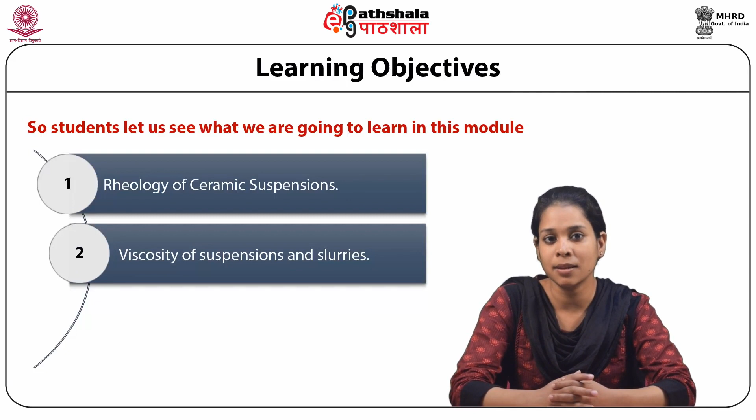Let us see what we are going to learn in this module. First we will discuss rheology of ceramic suspensions, then viscosity of suspensions and slurries, and lastly ceramic forming by casting.

Before moving into this module, we discussed dry pressing in the previous module. Dry pressing is a common method to form ceramic shapes, where dry powder containing a small amount of binder is used.

Ceramic shapes can also be produced from several other techniques. One is the casting process, in which slurry of ceramic particles is used to cast the required shape in a porous mold. This technique can produce complex shapes as well as massive refractory shapes, and is also used for advanced ceramics because of the ability to control agglomerates and achieve uniform mixing of additives.

Other than that, there are various techniques available for shaping a paste of ceramic powder, including extrusion and injection molding. These forming techniques are discussed in this module and we will discuss them one by one.

First we will talk about rheology of ceramic suspensions. Rheology concerns itself with the flow and deformation of materials. It is of great importance in the casting process. The parameter most commonly measured in rheological measurements is the viscosity.

In ceramic processing with suspensions, slurries and paste, it is essential to know the rheology. Rheology is important in processing as well as in operations such as storing, pumping, transporting, mixing, etc. of a ceramic system. A ceramic system such as suspension or slurry is a complex system.

The rheological behavior of such a system depends upon particle size, concentration of particles in the suspension, the interaction present between the particles, and other factors. So there are different types of rheological behavior in ceramic suspensions.

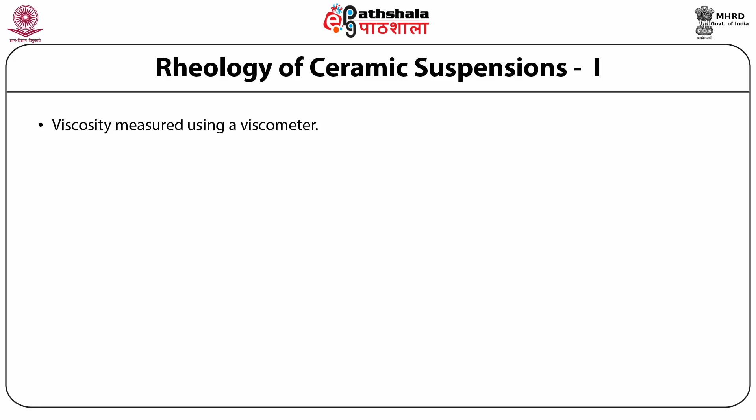The viscosity of a suspension is measured using a viscometer. The shear rate used for measuring viscosity can be varied. For a given shear rate, a shear stress is applied by the viscometer. The ratio of the shear stress to the strain rate is called the viscosity, given as tau equals eta times gamma dot, where tau is the shear stress and gamma dot is the strain rate.

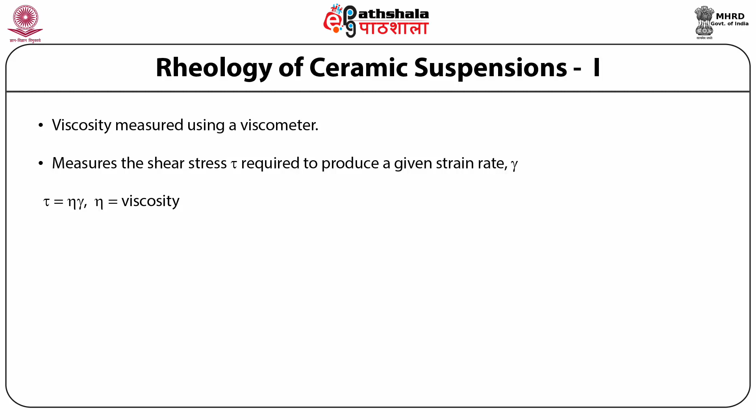It should be noted that the viscosity eta is generally a function of the strain rate, except in one case which is discussed in the next slide.

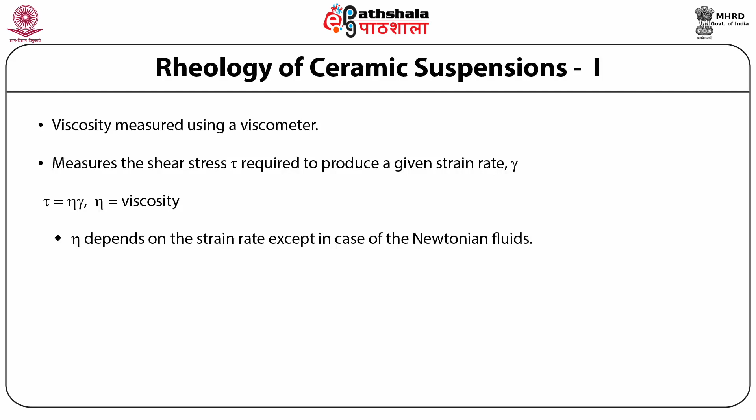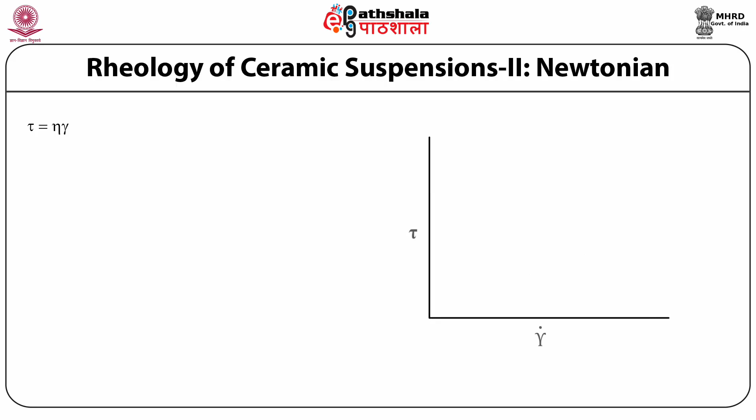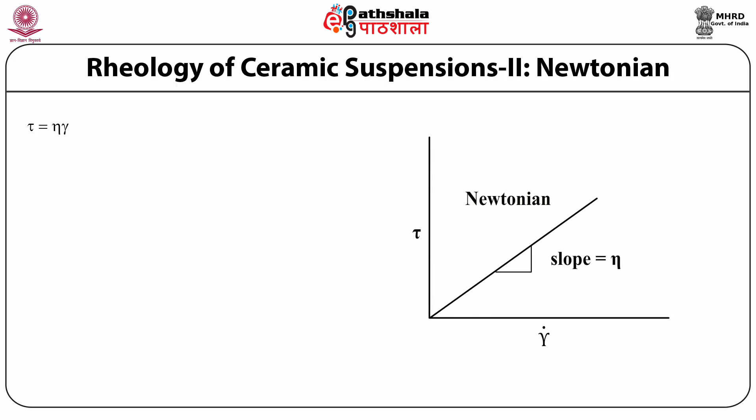The rheology of ceramic suspension can also be Newtonian type. The Newtonian viscous behavior of gamma dot is discussed here. When the shear stress is directly proportional to the strain rate at all strain rates, and the constant of proportionality, the viscosity, does not change with the strain rate, then the behavior of the fluid is called Newtonian viscous behavior, shown in this figure.

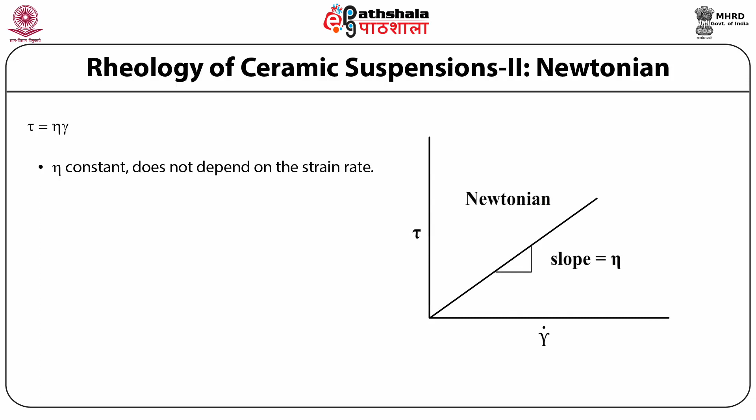In this case, a plot of strain rate versus stress is a straight line. Such behavior is found in pure liquids and in dilute suspensions.

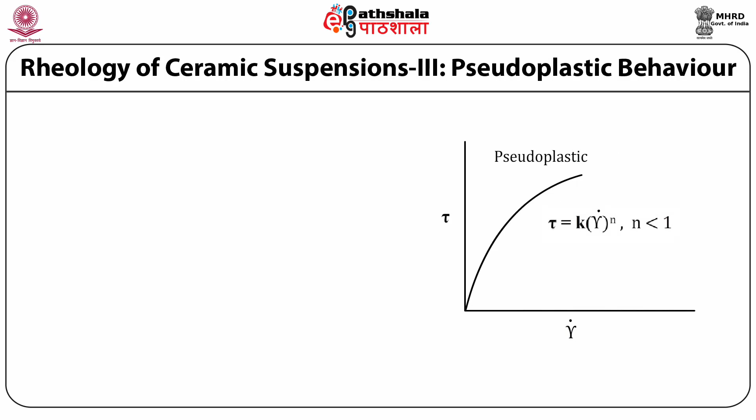The next behavior is pseudoplastic behavior. In this case, the viscosity decreases with increasing strain rate, that is, the apparent viscosity, given as eta A equals tau divided by gamma dot, decreases as the strain rate increases.

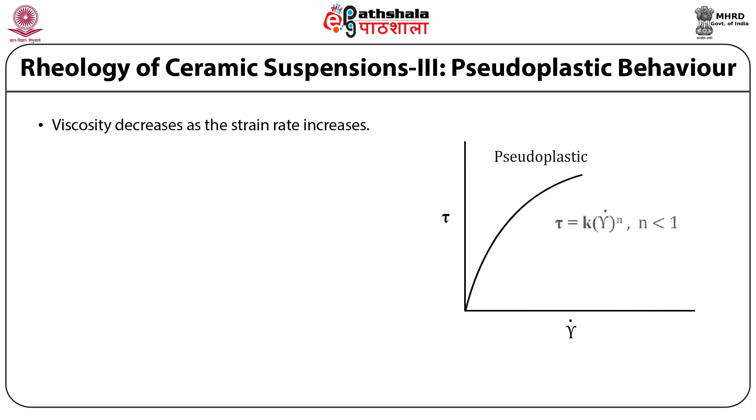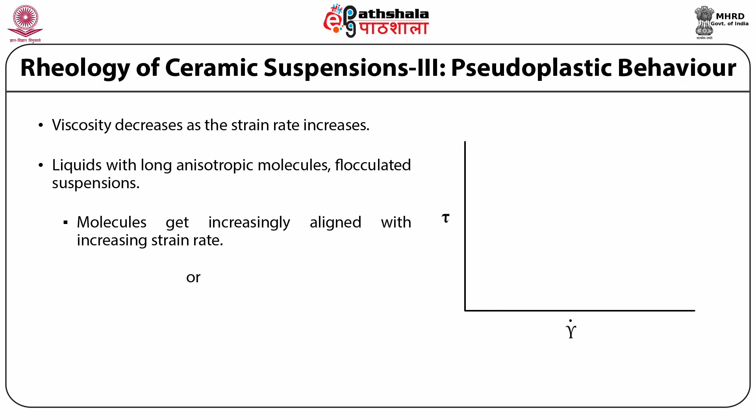A plot of strain rate versus stress has a decreasing slope with increasing strain rate, as shown in this figure. This behavior is found in liquids with long anisotropic molecules, suspensions with long particles, and in flocculated suspensions. As the shear stress increases, the molecules or particles get aligned in the flow direction and the strain rate increases. This behavior can also be described by the power law, stated as tau equals k times gamma dot to the power n, where n is always less than 1.

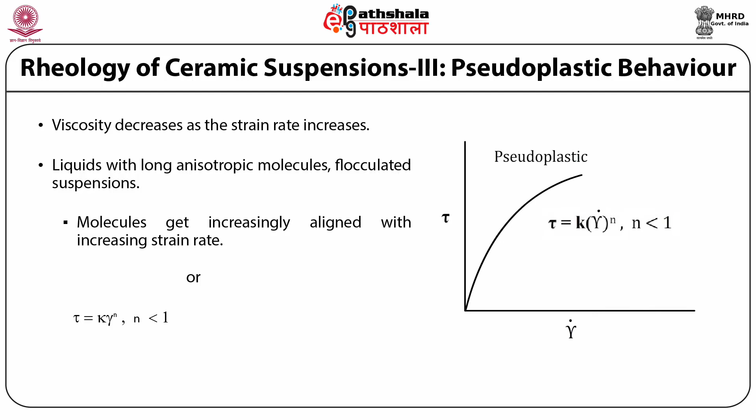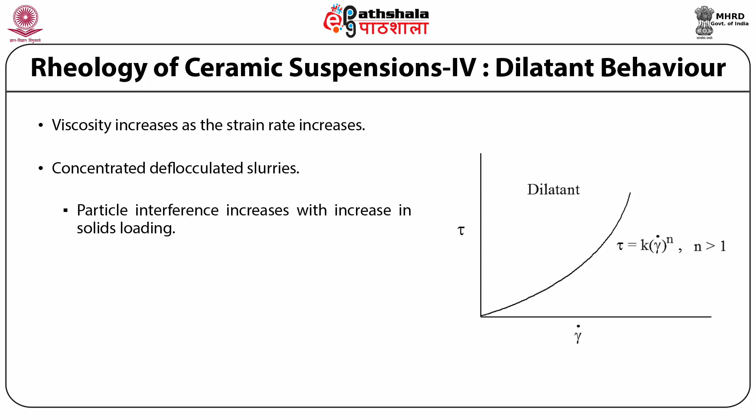This behavior is characteristic of concentrated deflocculated slurries. With increasing strain rate, particle interference increases, leading to an increase in viscosity. This behavior can also be described by the power law mentioned earlier, tau equals k times gamma dot to the power n, with n greater than 1.

In all the cases mentioned earlier, sometimes the plot does not start at the origin but starts at a finite value of the shear stress.

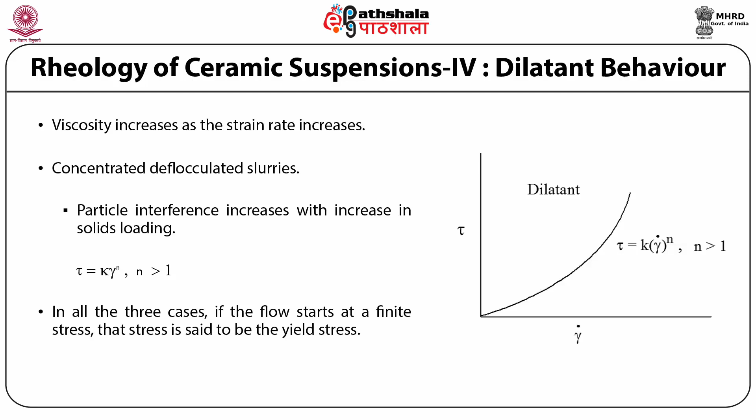The strain rate remains zero until the shear stress increases above a certain value. This value of shear stress is called the yield stress.

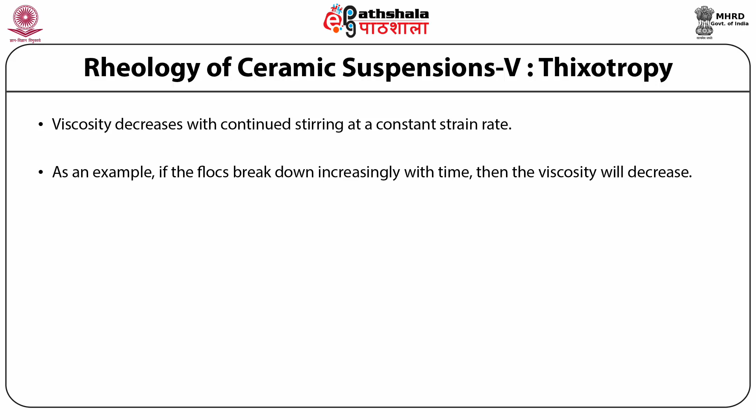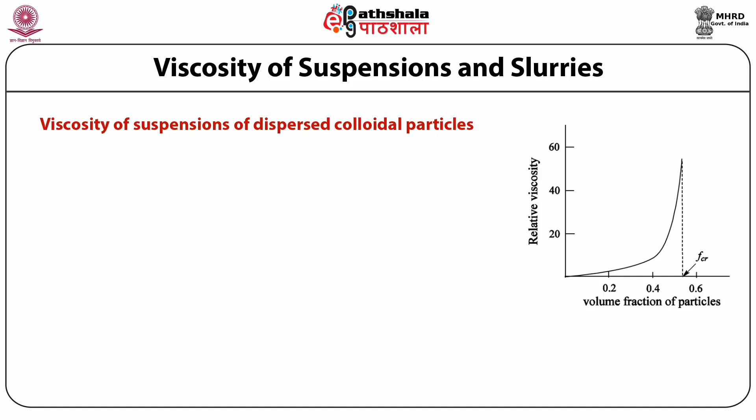So in this slide, we will discuss the viscosity of suspensions of dispersed colloidal particles and the viscosity of concentrated suspensions and slurries. We will first talk about viscosity of suspension of dispersed colloidal particles.

In this case, a relative viscosity eta R can be defined as the ratio of the viscosity of the suspension to that of the pure liquid, given as eta R, the relative viscosity, equals the ratio of eta suspension and eta liquid.

For a very dilute suspension of non-interacting spheres in a Newtonian fluid, the relative viscosity is given as eta R equals 1 plus 2.5 times F, where F is the volume fraction of the particles. The increase in viscosity with increasing F is caused by the dissipation of energy as the liquid moves around the particles. This equation is known as Einstein's equation.

Now, if we talk about non-spherical particles, then the constant in this equation, eta R equals 1 plus 2.5F, the constant is more than 2.5. It will not be 2.5.

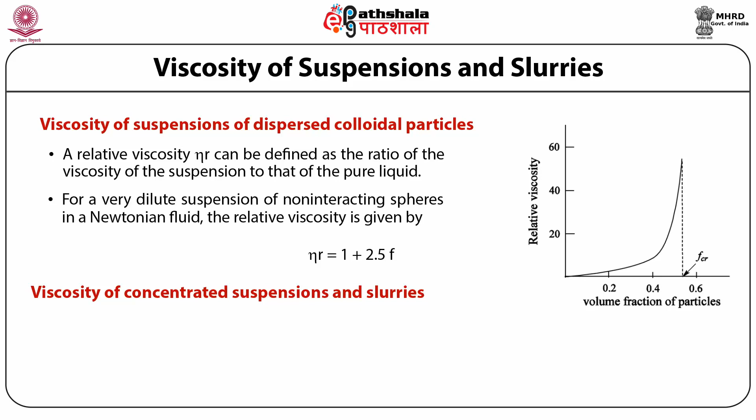Now we will discuss the second case, the viscosity of concentrated suspensions and slurries. The equation described above for relative viscosity is valid for dilute suspensions. When the concentration of particles is greater than 5 to 10%, the interference between the particles causes the viscosity to increase rapidly. The behavior of concentrated suspensions and slurries can be described by an empirical equation.

This equation is given as eta r equals 1 minus F divided by FCR, to the power minus K times FCR, where FCR is the critical packing factor at which flow is blocked and K is a parameter. The behavior can be seen in this figure. For an aqueous suspension of latex spheres of diameter 0.7 micrometer, it was found that K is 2.7, and FCR is 0.57 to 0.68 depending on the shear rate.

The same expression describes the behavior of slurries, which may have particle size distribution ranging from colloidal to coarse particles. So a simple equation can be eta r equals 1 minus F to the power minus K. This equation is used sometimes. In this equation, K equals 3 for a continuous distribution of sizes that pack more efficiently, and K equals 21 for coarse particles of uniform particle size. Now, as 1 minus F is less than 1, eta r is higher for the latter case.

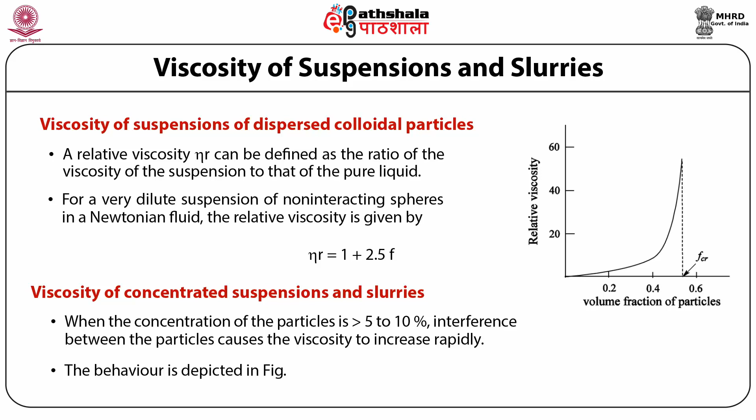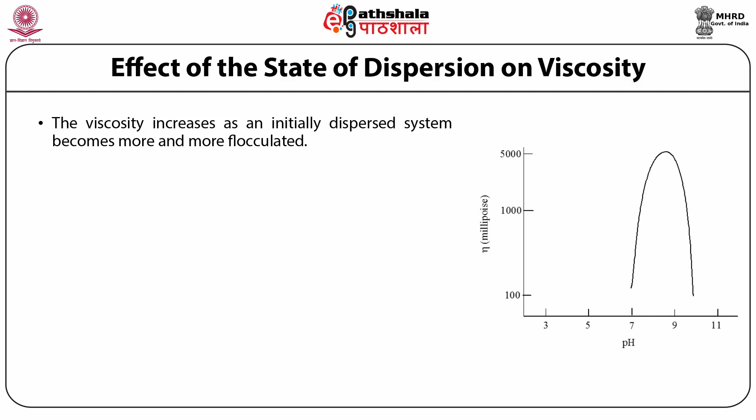Now we will discuss the effect of the state of dispersion on viscosity. The viscosity increases as an initially dispersed system becomes more and more flocculated. An example is shown in this figure where viscosity is plotted as a function of pH. Near the isoelectric point, aggregation of the particles occurs. The increased torque required for this causes an increase in the relative viscosity.

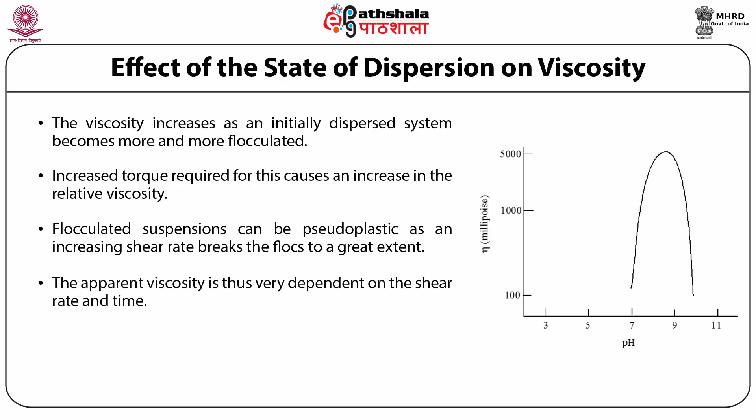The flocculated suspensions can be pseudoplastic, as an increasing shear rate breaks the flocs to a great extent. It can also be thixotropic if more and more flocs break with continued stirring. The apparent viscosity is therefore very much dependent upon the shear rate and time.

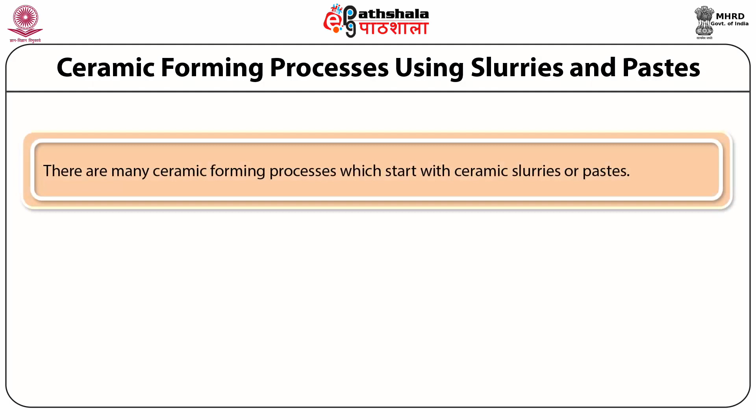Now we are directing towards the ceramic forming processes using slurries and paste. There are many ceramic forming processes which start with ceramic slurries or paste: casting, filter pressing, extrusion, injection molding, etc. We will discuss all of these one by one.

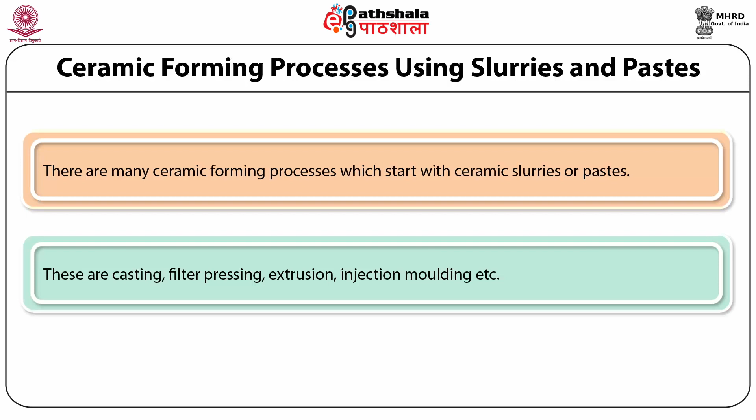So here comes slip casting. Slip casting is a technique used for manufacturing chemical porcelain ware, refractories having complex shapes or massive in size, sanitary wares, porous thermal insulations, bone china, and so on. Slip casting is also used for high performance ceramics with complex shapes because of the ease of controlling the agglomerates, better mixing of the additives in the slurry, and low investment.

The process essentially consists of preparing slurry of the ceramic to be used and pouring it into a porous mold. The liquid is slowly sucked out through the pores of the mold due to capillary action to the external surface, where it evaporates. A cake is formed adjacent to the internal surface of the mold, and the remaining slurry can be poured out of the mold after the required thickness of the cake has formed. This complete process is called drain casting.

So we will start with slip casting. Alternatively, the slurry is not poured out and the casting process is allowed to proceed to completion, at the end of which a solid body with a pipe running through its center is produced.

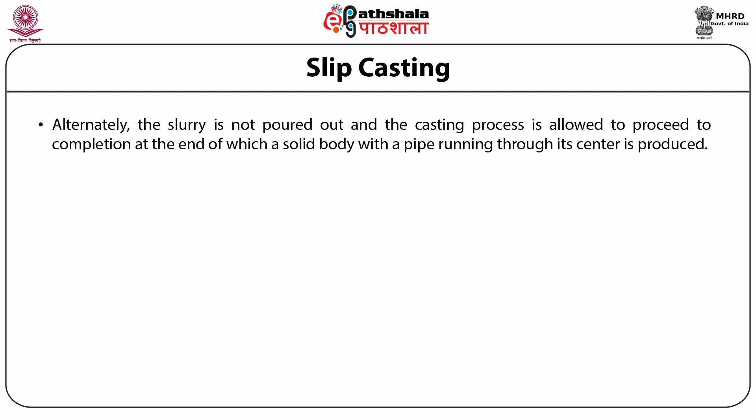The casting time may range from 1 hour for a porcelain part with a thin wall to several weeks for a refractory cast of thickness 30 centimeters. The casting time may be reduced by pressure casting or vacuum casting.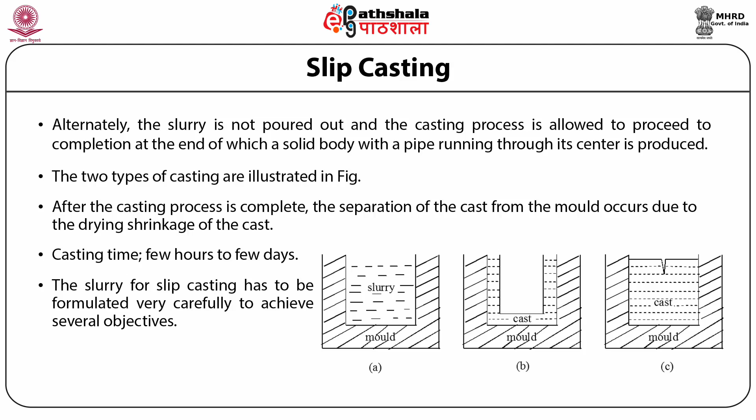The slurry of slip casting can be formulated very carefully to achieve several objectives. These include: the casting rate should be reasonably fast; the cast should have adequate strength for handling subsequent to drying after removal from the mold; the level of porosity in the cast should be as desired; and the cast should have uniform thickness. Now there are some considerations which we should keep in mind in slip casting.

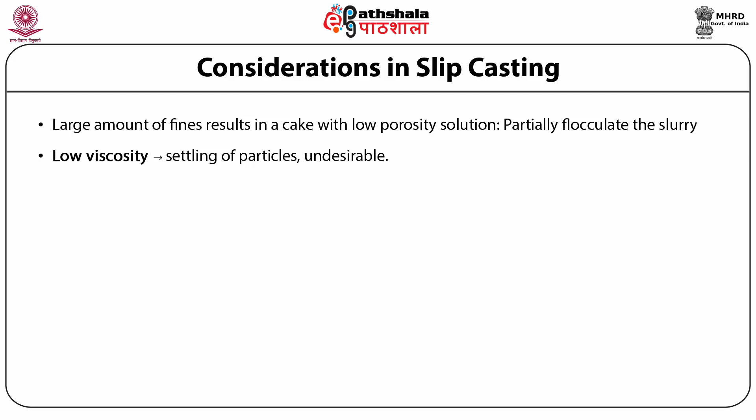Some factors which are considered while formulating a slurry for slip casting are: first, a large amount of fine particles in the slurry will produce a cake that has a low porosity, and so the casting rate will be slow and non-uniform. To avoid this, the slurry can be partially flocculated. Second, if the viscosity is too low, the particles would tend to settle to the bottom and the available casting time would be small. In slurries with a high viscosity, larger particles can be accommodated.

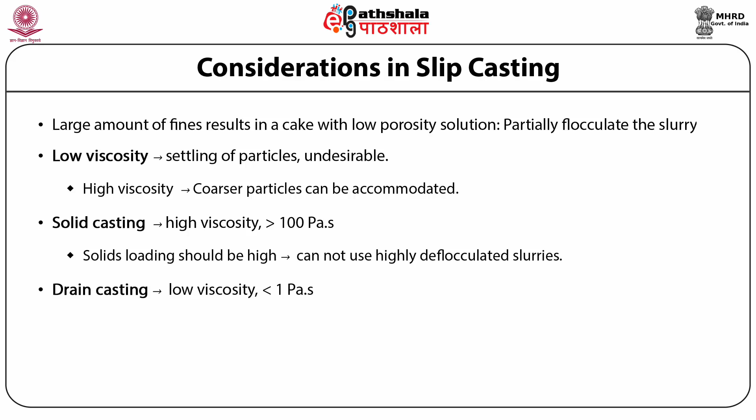Third, it is desirable to keep the solid loading in the slurry as high as possible so that less liquid has to be removed. The solid loading depends on the thickness of the double layer around each particle. In a highly deflocculated slurry with fine particles, with each particle having a double layer, the particles cannot be brought closer than a certain distance, and so the solid loading is limited. Fourth, for drain casting, the viscosity should be low, less than 1 Pascal second, while it can be greater than 100 Pascal second for solid casting.

And the last one is that binders are used to provide strength to the cast. Most often, clay is used as a binder. Organic binders of medium molecular weight or inorganic binders are also used. A mixture of binders can also be used instead of clays.

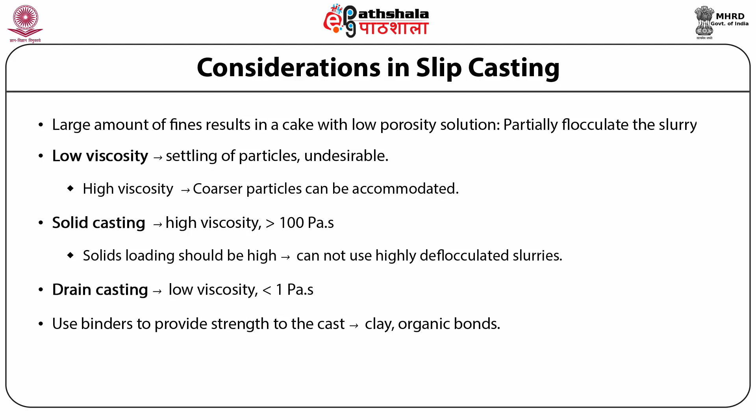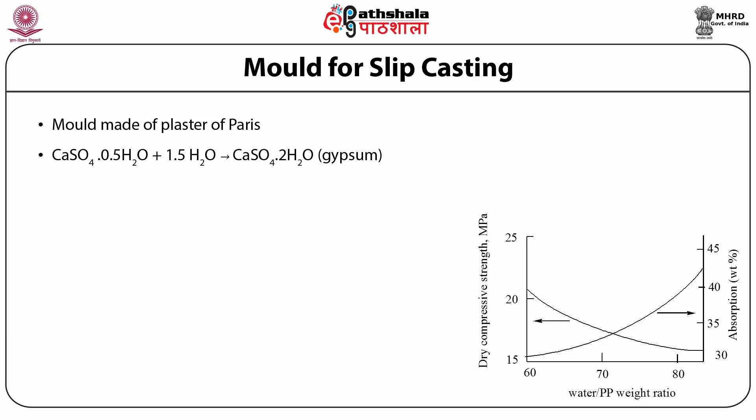The mold is commonly made from plaster of Paris, that is PP, which is partially hydrated calcium sulfate. On addition of water, it gets hydrated to gypsum, and the equation is written as follows: CaSO4·0.5H2O plus 1.5 H2O gives CaSO4·2H2O, which is gypsum. The gypsum forms in the form of interpenetrating needles and plates and produces a mold with adequate strength.

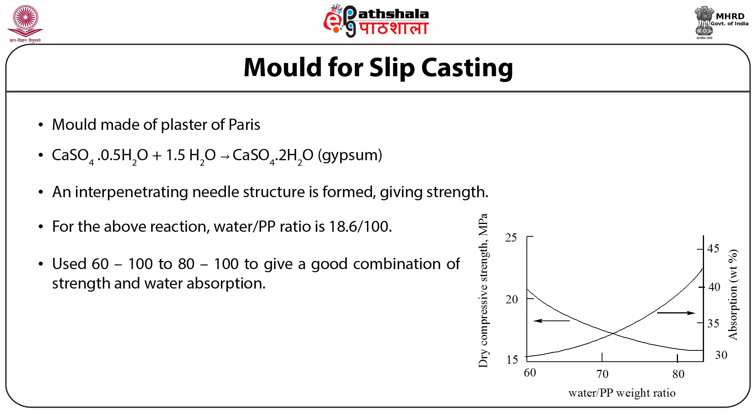The water to PP ratio according to the above reaction is 18.6 by 100. So a range of 60 by 100 to 80 by 100 is used to produce the mold to give adequate porosity. The variation of the strength of the mold and its water absorption capacity with water to plaster ratio is also shown in this figure. The liquid being removed from the slurry has to pass through the cake which forms on the wall of the mold. The cake acts as a filter.

The uniaxial flow rate through a filter is proportional to the difference in pressure, that is delta P, across the filter with thickness L and cross-sectional area A. So the equation becomes Q is equal to Kd A delta P divided by L, which can also be written as Kp A delta P divided by eta L, where Kd is the Darcy permeability coefficient and eta is the viscosity of the filtrate. Moreover, Kp is the specific permeability.

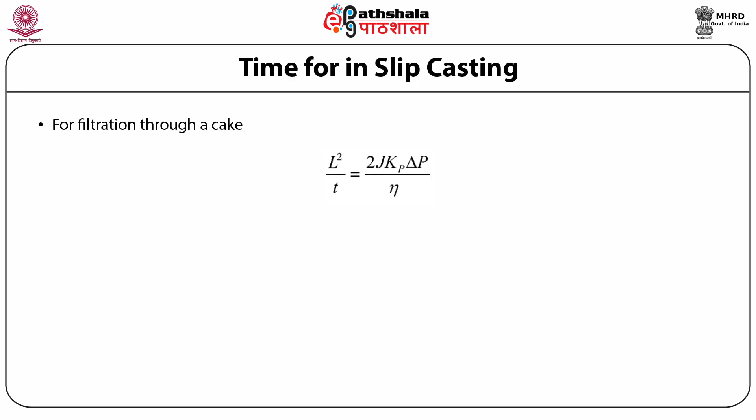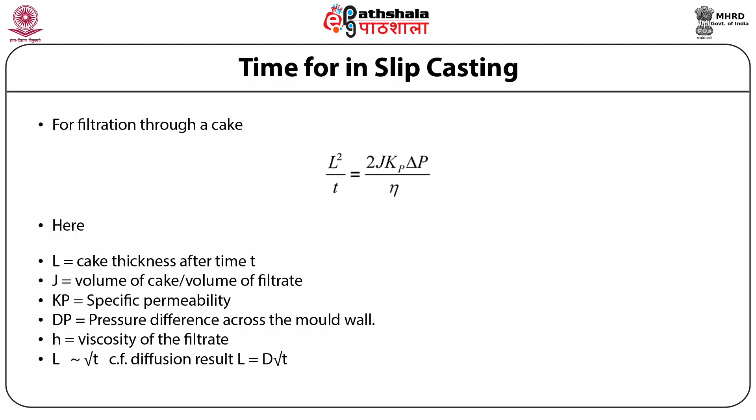For the filtration through a cake, one gets the formula L squared by t is equal to 2J Kp delta P divided by eta, where L is the thickness of the cake produced in time t, and J is the volume of the cake per unit volume of the filtrate. This equation shows that the thickness of the cake increases as the square root of the time of casting, and it is similar to the diffusion equation, L is equal to D times root t, where L is the thickness through which the diffusion of the species takes place in time t and D is the diffusion coefficient. Now the next process is tape casting.

The tape casting process is used to produce thin ceramic sheets, meaning less than 1 millimeter thick.

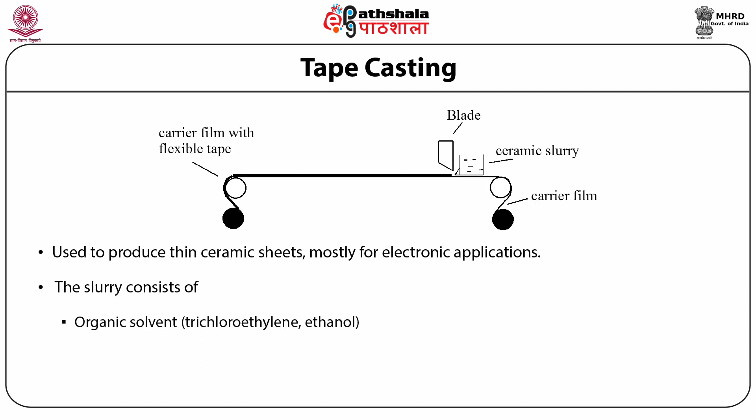A slurry made in organic solvents like trichloroethylene or ethanol, containing substantial amounts of organic binders such as menhaden fish oil, polyethylene glycol, etc., is poured over a flat surface, and a sharp blade with a small clearance positioned over the surface is moved along it, as seen in this figure.

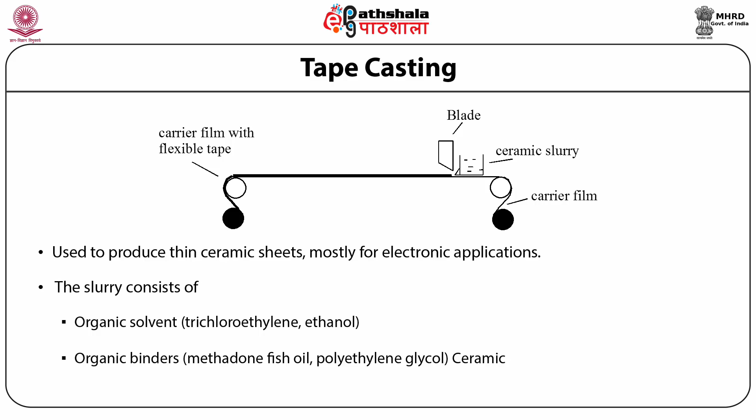This produces a thin layer of constant thickness. The thickness of the layer can be controlled by controlling the gap between the blade and the casting surface. Upon drying, the sheet becomes leather-like and can be slit, punched, etc. before sintering. This process is used to produce multi-layer capacitors, substrates for electronic packaging, etc.

Now we will discuss plastic forming. A mixture of clay and water produces a plastic mass, as we all know, which can be shaped by deforming into the desired shape. Processes like extrusion, plastic pressing, and jiggering have been traditionally used to shape clay bodies.

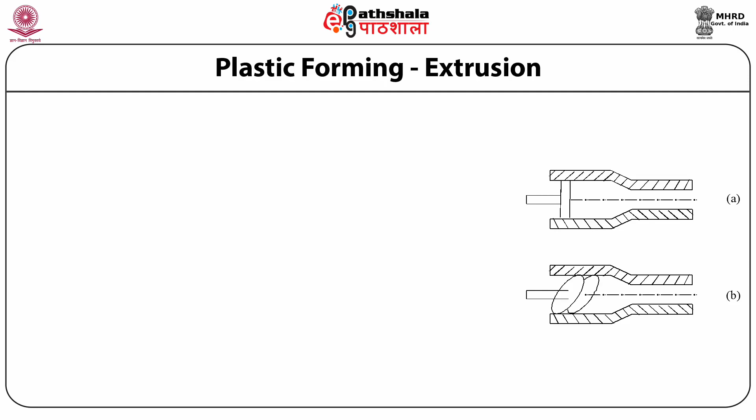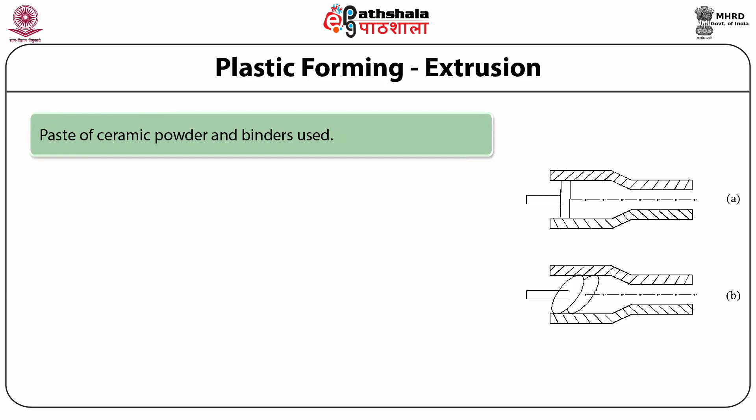A plastic mass can also be produced by mixing any ceramic powder with clay or organic binders, and the same process can be used to produce the part of that ceramic. So we will first discuss extrusion.

In extrusion, the plastic mass is forced through a rigid die having a desired cross section. The process is used to produce long sections with a desired cross-sectional shape. The products made by extrusion include a variety of refractory and porcelain products of complex shapes such as hollow furnace tubes, honeycomb catalyst supports, transparent alumina tubes for lamps, flat substrates, etc.

So the two types of equipment used for extrusion are discussed below. In one, the plastic mass is pushed by a piston inside a barrel and through a die, which is shown in figure A. This is a batch process in which feed material is fed intermittently.

In the second type of equipment, the feed material is fed and carried in the barrel by a rotating screw called an auger. This is also shown in figure B. The arrangement of the auger extruder is shown in this figure also.

The pressure used in a piston extruder is about 4 megapascal for porcelain bodies and about 15 megapascal for organically plasticized bodies. This can be compared to the pressure of about 200 megapascal used in dry pressing.

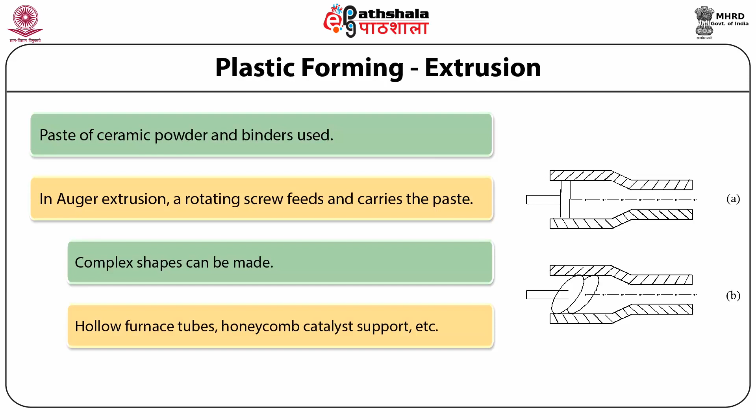In injection molding, thermoplastics are preferred over thermosets because of factors such as storage stability and reusability of scrap. Two types of thermoplastics are generally used. One is called the minor binder, which during post-forming removal of the polymer burns out earlier and provides pore channels for the escape of the major binder, which burns out later.

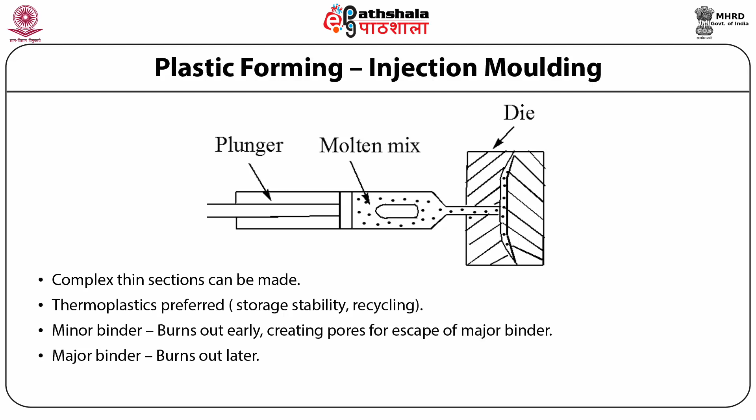In addition to the binders, a plasticizer or lubricant, and a surfactant for particle wetting are also used. Some examples of major binder are high molecular weight polythene, and an example for minor binder is paraffin wax, etc. The temperature used during injection molding is about 125 to 150 degrees Celsius, higher than the Tg of the major binder.

The pressure used is 30 to 100 megapascal, and during injection molding, maintaining suitable temperature at each location is a very critical process. Parts with complex shapes, dimensional accuracy, and smooth surfaces can be produced by injection molding. The tolerance in thickness, which is around 0.5 to 5 mm, and holes smaller than 1 mm can be produced with a tolerance of less than 0.1 mm.

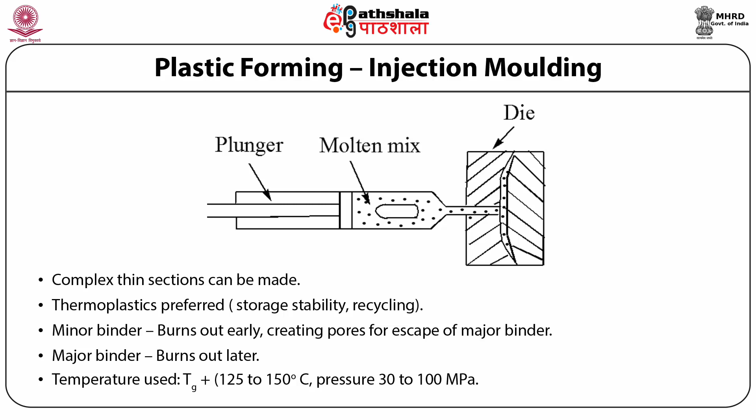So students, let's summarize what we have learned in this module. First we read about casting and plastic forming processes. Then we discussed the first process, that is casting, where we learned that rheology is very important.

Next, we read about pseudoplastic behavior, in which viscosity decreases with strain rate, which is desirable for casting. In slip casting, a slurry is poured into a porous mold made of plaster of Paris. A cake forms, which is stripped off and fired to yield the ceramic part. The process is used for complex and large refractory shapes, sanitary wares, and so on.

Next we discussed extrusion, where a paste of ceramic and binders is extruded through a die to make complex shapes such as honeycomb, catalyst supports, hollow tubes, etc. We also discussed that the injection molding process is very similar to that used in polymer processing, where a paste of ceramic powder and up to 70% polymers is used, and thermoplastic polymers are preferred over others. Thank you.